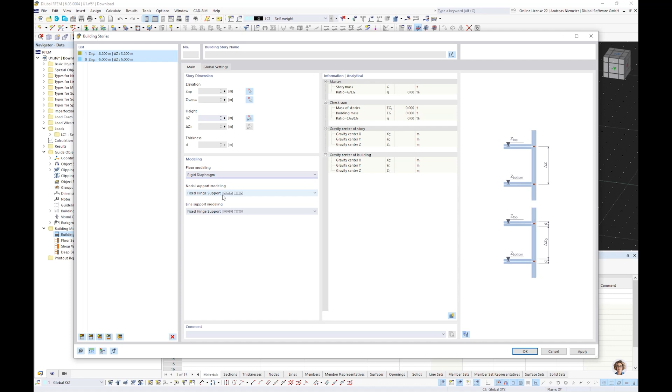Further, I specify that the floors should be considered as rigid diaphragms in the 3D structure, and additionally the slabs or ceilings from the first and second story should be supported on hinged supports - of course you can select something else. Now I confirm, and no blinking or highlighting info appears. Only you will see in the middle a dimension showing the height of the stories, not more and not less. And now we can start modeling the building.

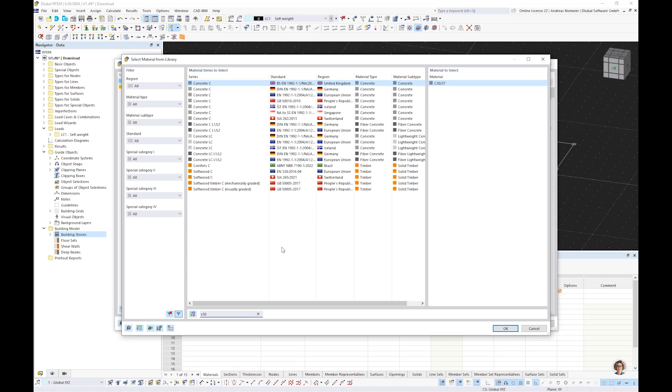For this I use, for example, the column command. Let's say we have columns here. We know the column should be a concrete rectangle, so I go into my library, select a square rectangle, maybe with a size of 300, and a concrete grade - let's select C30 here, and you see the program directly finds the suitable concrete matching this keyword, and we confirm this.

It goes gray, and now we can start modeling. The exotic part now is that the program asks me with a small dialogue: do you want to have this column in story 1, story 0, or both? In my case, both, and now I pick it. Oh, I can't find the snap point - so like in a CAD program, you can activate it here. And now let's go to the other places, and maybe it's easier if we use a top view and jump around this duct.

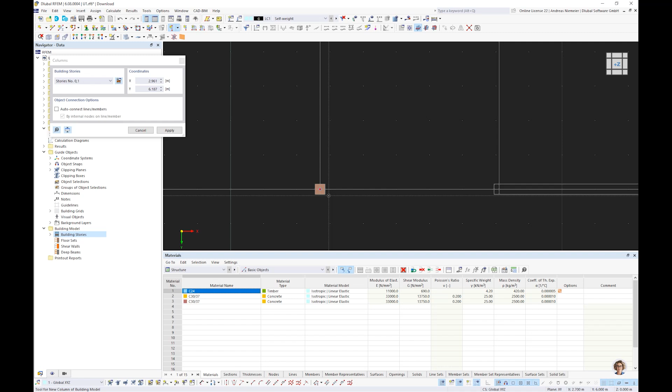Of course you can also copy if it fits. We have no rules for this. It's still like RFEM, that you can do everything in every stage, but now have a look. If we change to, let's say, isometric view, maybe make this box here. You see you have the columns here, and with the right length, 5 meters, 3.2. The same for, let's say, the ceilings.

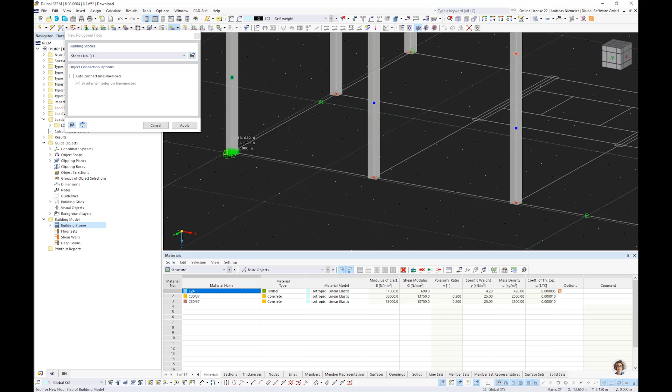We can take here maybe a polygon floor plate, and we specify here, for example, C30 and a thickness of maybe 22 centimeters, and go. And now let's say we pick, for example, the corners of the building, and maybe we realize, oh, we need it only for the first one and not for the others, so we can change it during picking, because the program will realize it.

And now you see we have this ceiling inside, also with the opening for the stairway. If you want to do the same for the top, we open the command again and say now maybe the upper story, and we pick the points here, and maybe this corner point here, and right click. Now we have the upper story.

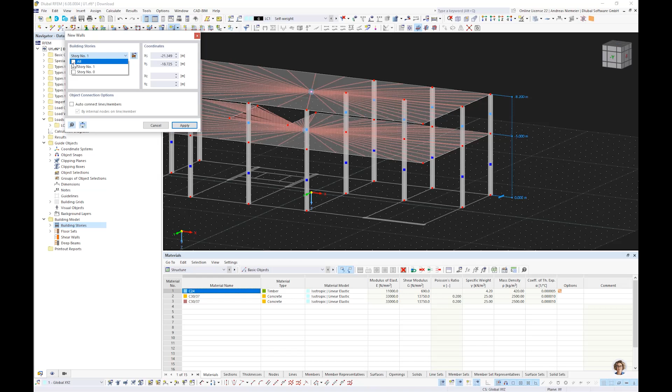And now we see, oh, we have also walls here. No problem. There is also a wall command where you can select maybe a different thickness, maybe here with 24 centimeters, but for concrete. And if you pick it, you can say for which stories. I say for all. And now we define the wall should run from here to here, and the same for here to here, and maybe the last one from here to here.

So easy it is to define a building with walls, ceilings, columns, and now it works like before. We can apply maybe supports, so for example here also nodal supports. Now maybe here, that we can grab all at once. So this is it, not more, not less.

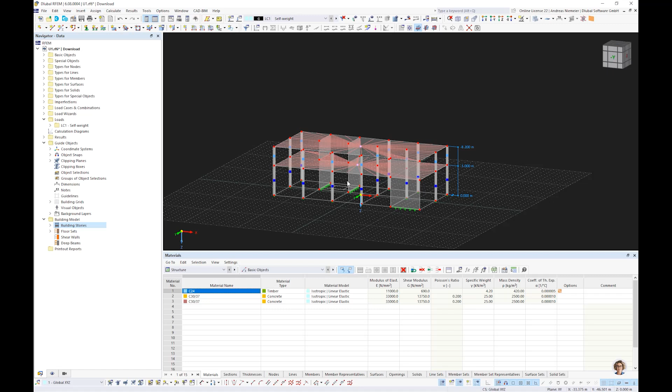And of course we can start the calculation, and you see the program is dividing the calculation job of load case 1 into 3 parts. Why? This you will see now in the results. If I scale everything up, you see here we have 3 types of results: walls, floors, and both together.

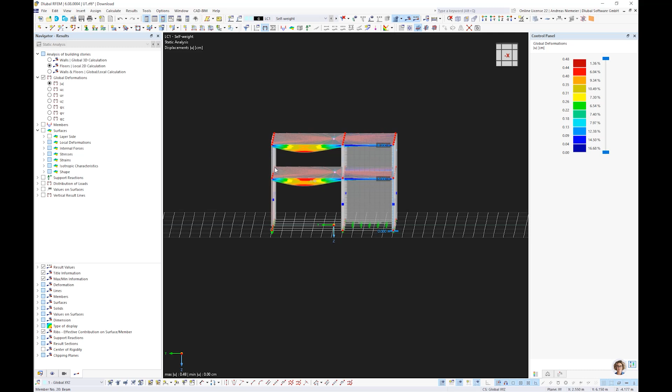And this is now the way of thinking like a building. You have now, for example, here only floors. This means the program interprets the floors as a separate substructure. It calculates the ceiling with separate supports and separately. So I get for these elements only bending moments, but no membrane forces, because I assume these slabs work rigid in plane, that maybe the main structure is working, but this ceiling itself I calculate separately.

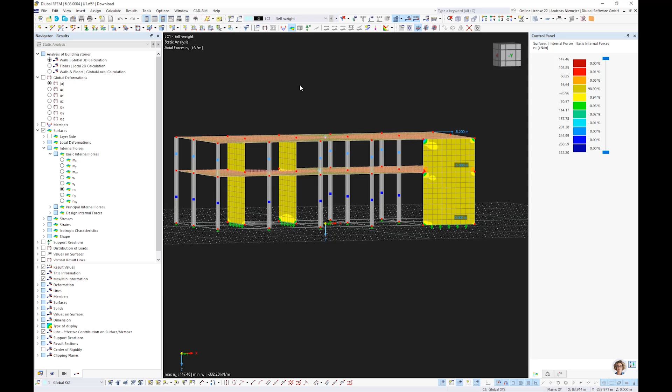And the support reactions from the floors I transfer to the walls, so that I can calculate the core of the building. This means in this model we have 3 calculations: one for the first ceiling, the second, and for the walls itself. So it's separated, and this ceiling is not hanging on the top, for example. So now let's extend this example; I prepared something.

So I close this and I open a more exhaustive example, it's called building model. So here you will see the same building with more stories, with different story heights, with a bottom floor, a ground floor, some regular floors, and a roof floor.

And you see also here, for example, the increasing normal axial force gradient of the columns, because I'm just visualizing the wall result. The columns also belong to it, and here we have our slab or ceiling, where you see these are the ceilings with deflection because of snow, but it acts separately.

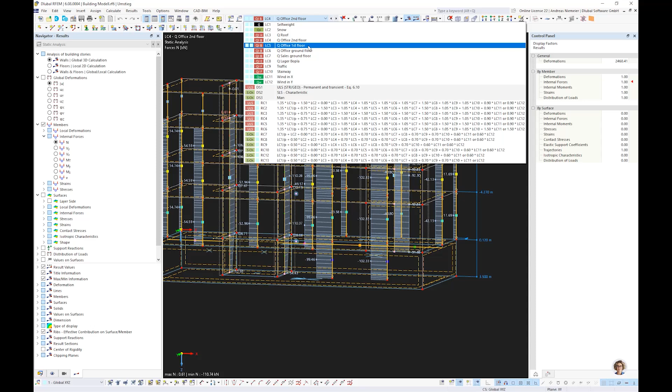And if you visualize maybe the normal axial force, you see the lower slab has no effect on the upper. For example, if we show here a live load, you see the live load from this ceiling is going down but has no effect upwards. So with this type of calculation you can control the flow of forces.

Further, you see with these results, if we watch here, for example, again this self-weight result, you get it not only graphically, you also get a table for this result. You see here in static analysis we have the way of thinking not only for members, surfaces, solids, but also for stories. The program gives you information about the mass per story.

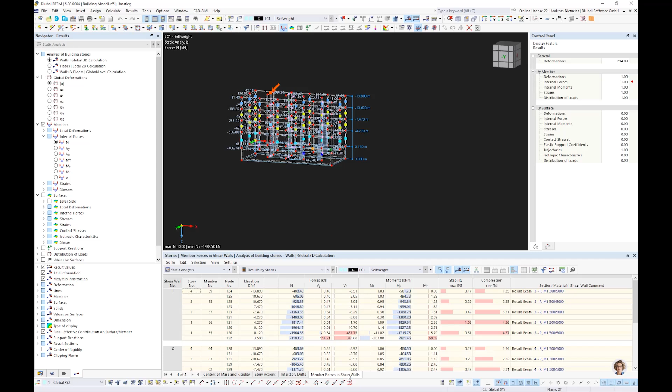The program gives you the center of mass for every story and the center of rigidity for every story. So it calculates it in this separate task. Further, you get for every wall in this story, if you specify it, also forces. So how can you define a wall?

Here you see in your building model we have not only stories and floor sets, but also walls and deep beams. In this case I defined 3 walls. They have a section like a beam, and one wall is this, and this in front here.

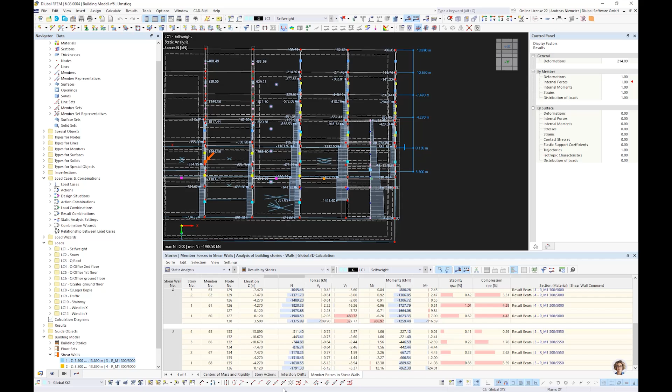And if I define it as wall, the program interprets it like a beam. And all these forces you get logged down here in this table for every load case. You see the increasing normal force in load case self weight for wall 1, wall 2, wall 3, and you get story actions.

These story actions are interesting if you take a look, for example, on wind. So we have here a wind load case in this horizontal direction. The building model allows you to interpret the building like a diagram and gives you the separate components per story. So the wind load on the top story brings 20.4, the next 32.4, 32.4, because we have a similar height. So everything is logged down over the height of a building, and this should help you to interpret the building, if you can simplify it like this concept.

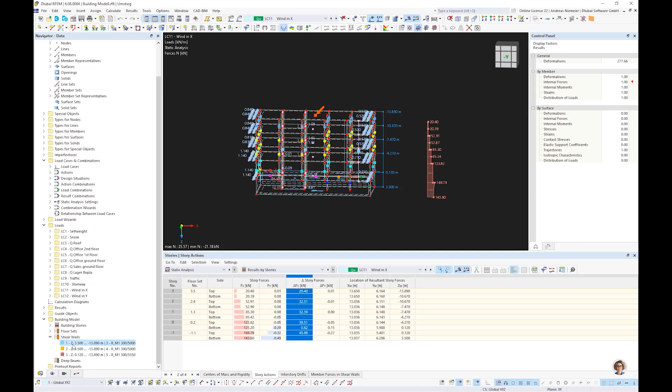If you have stories in between that need the transfer, or the reaction of deflection or the stiffness of the floor itself, you can control it here by defining if it's rigid or not, or if it's semi-rigid. So all these options are available per floor. So this brings me to the next point.

What if you have a more complex building that is not only a story-wise building with ceiling, column, and so on? Then of course you have to take all calculation options and consider stages in between. For stages we created a further add-on, but to explain how this is working, I prepared a model. I called it construction stages, and this should give you an idea which type of issues or challenges could happen when designing buildings.

Here I have a simple building. You have columns restrained on the bottom, a beam that is supported hinged on the columns, and a timber roof that is also supported hinged here. If you watch the forces from self-weight, at first everything looks nice. You get in the columns the increasing normal force diagram. But what is a little bit unclear is why I get such big compression forces in the timber beams from self-weight, even if there is no load on it.

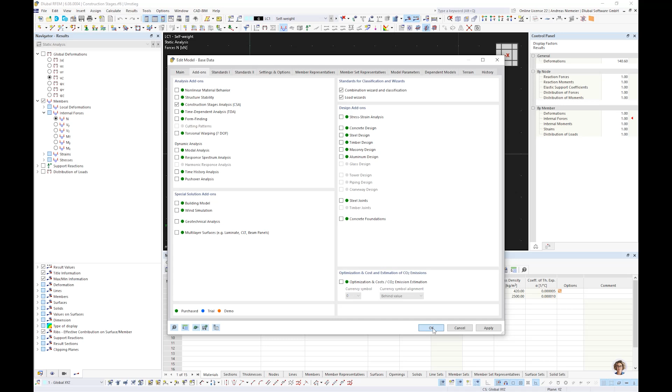And for this we implemented stages. Of course, such an option also existed in the old generation, but it was really restricted to third order large deformation analysis. Now it's completely integrated in the program and open for all calculation theories.

How does it work? At first we make a stage, let's say column. In the column stage we have members and nodal supports. The members are clear, these 2. Supports also clear, these 2. Then we have a next stage, let's say the girder. Here let's assign, it's really easy, it's like bricklaying. The next is roof.

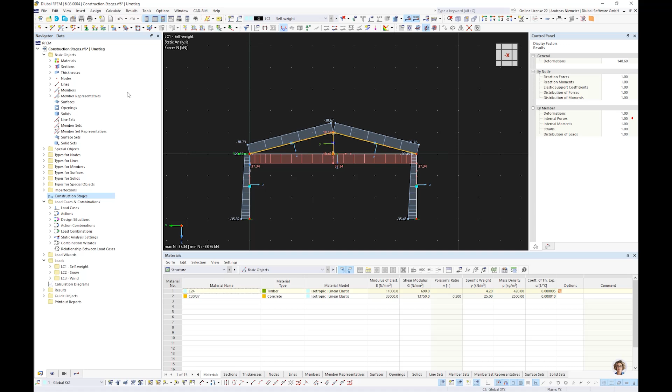So I selected these 3 stages with these elements. You can visualize it also: column, maybe I hide what is not active, girder, roof. Now the program has to know which loads act on it. I want to design column stage, girder stage, roof stage, and I expect that in stage 1, columns, only self weight and wind are acting. In girder, wind is acting additionally, and in roof, snow and wind are acting.

And what happens now? The program creates load combinations for every stage. So you have here a separate column for stage 1, stage 2. In stage 1 we get only self weight and wind. For stage 2 we get self weight and wind. For stage 3 we get self weight, wind and snow. And it's that easy.

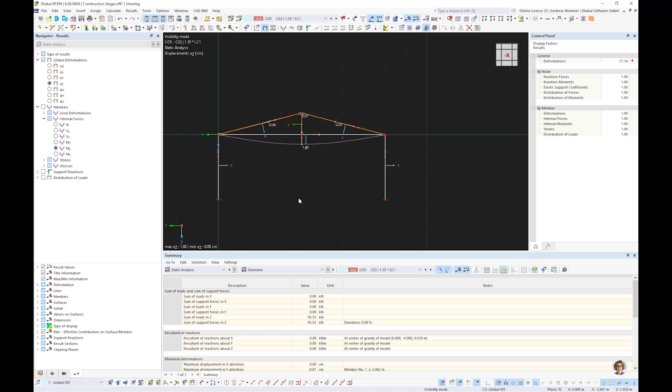So when I design this design situation, the program calculates it for every stage, and it cannot calculate all at the same time because each stage is always the basis for the next. If I calculate stage 1 only for the columns, with wind, they are loaded and will be deflected. Then we place the beam on it, it will be loaded, and also get the deflection. And here you see the camber, and on this deformed state we finally define for construction stage 3 the roof. And you see now in this type of analysis we have no tension force on it.

And this is what I want to show you. RFEM 6 gives you now the option to work like this. You can really define how you assemble it on your building site. And in comparison to RFEM 5, you now have the choice to use geometrically linear analysis, second-order or large deformation analysis. It's even possible to say the stages themselves should be analyzed according to large deformation analysis.

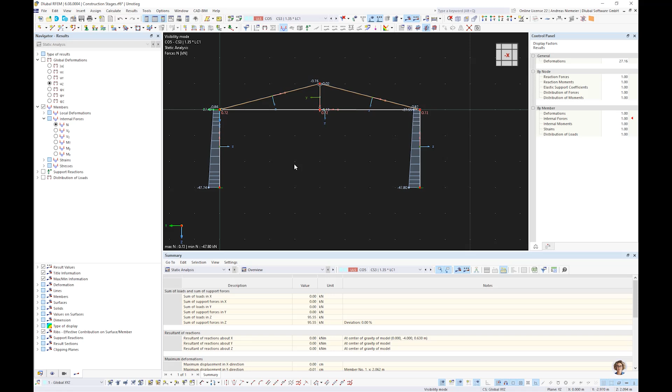And the individual load situations on these stages should be calculated linearly. It's also possible. Then the program changes the basis of this. So, further, this was the example: think like a building and interpret it. Now we come to the next point, and this means efficient usage of couplings, because we coupled here the stages, so construction stage with load, but there are more couplings possible, and RFEM 6, the new generation, lives from it.

This means I close this example and open a new example, where I want to take over reactions. For this I have the ceiling above the first floor, and the second model, the ceiling above the ground floor. To use the space of the monitor, I remove the spreadsheet and organize it in these two views. So we have here the first floor, here we have the ground floor.

What is the difference? Let's go through the model. If we take a top view, you see we have a line support here, so we simulate a wall. And we have a load case self-weight, we have a load here, a load here, and a load here, and all will be combined. In this model, from top view, we have no wall below, so this is one big room. And in the load cases, we have self-weight, one load for this room and one load for this room.

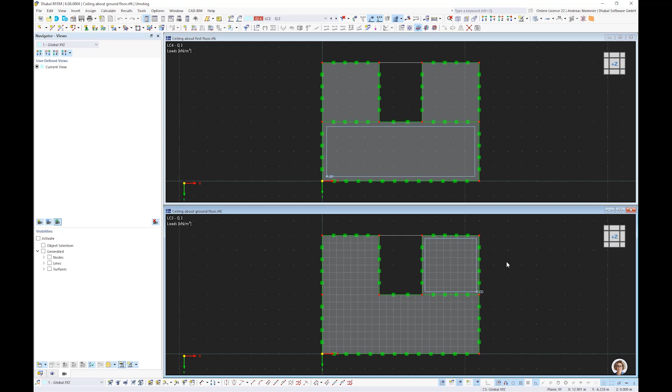And now the question appears: if I calculate this structure, I get support reactions for every load case. When I activate it, we get deflections and of course also reactions. And now we have to apply these reactions on this model. For this, I have to think about how I want to bring them in. I have here two basic independent load cases and I copy it three times: 3 from top, 4 from top and 5 from top. If you wish, you can also sum it up. You will directly see what happens.

What we should avoid: we have here these three load cases. Number 1 is clear, 2 is clear. Here, because I copied it, we don't need a load on it. Delete and delete, so these last three are empty. And now you can use the wizard for taking over. We have here import support reactions. You can say, I want to import it from the ceiling above the first floor. It's in the project from Dlubal Center.

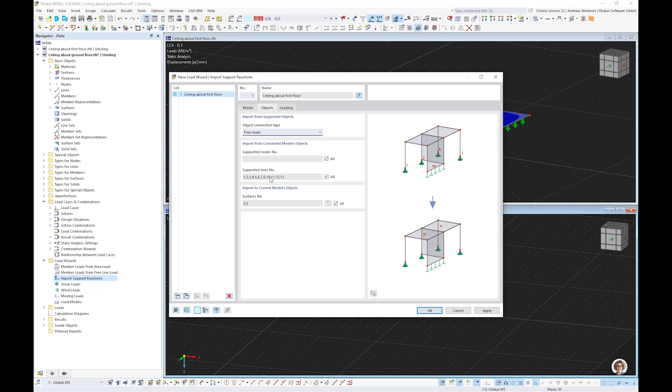You can decide whether you want to import support forces as object loads or as free loads, from all supported nodes and lines, meaning these lines and nodes, and on surfaces 3 and 5, meaning these surfaces. In comparison to RFEM 5, we can use nodes and lines without exotic connections. Further, you can define the transfer to load cases: load case 1 should run into load case 1, and the other three load cases should run, manually, into 4, 5, 6. So here you really can decide which load should be transferred.

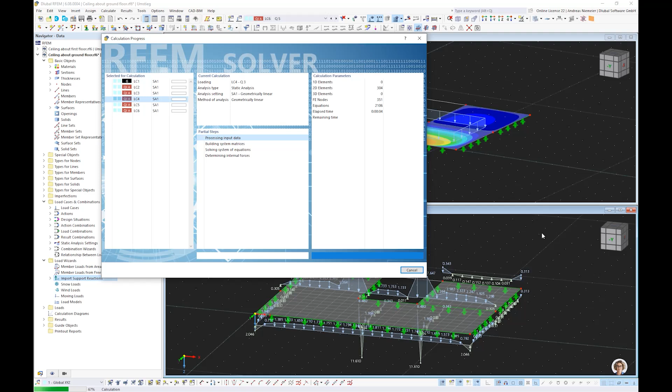The program visualizes it with a question mark, and if I calculate it, the program will take the reactions from the upper model and define them as loads on this one. Use connections efficiently, this is the point I want to show you. You don't have to write anything, it's done automatically. And what is really nice: self-weight is clear, it's a permanent load, and where we have a wall on top but not below, you also get a free load here. The regular load cases are used as defined in the table, and here we have the loads from the separate load cases, from this room, this room, and this room. This is a really efficient usage.

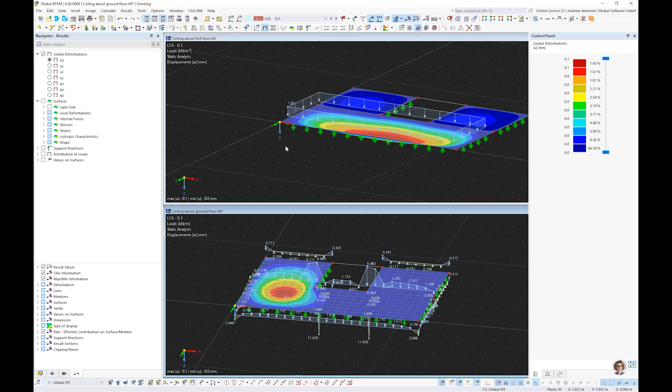And what is also really a difference to the old generation: if you have the situation, for example, in the permanent state, where we have a load from the roof. For example, I use a standard load of 1 here and here, and we also have a horizontal effect, maybe in X.

Let's use here 1, and let's use here -1, so that we have some roof load effect. And you specify now in the lower model, in the wizard: program, please use for the permanent state not only the Z direction but also the X component, and confirm it. The program wants to delete results. Yes, we have to save, clear.

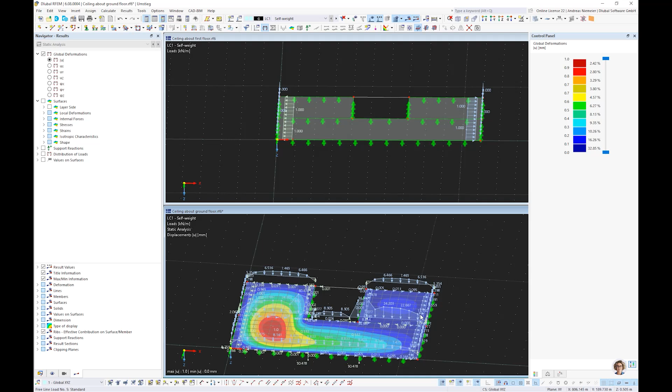And now when we recalculate, the program is using the data from the model above, also the horizontal stuff. So it calculates first the floor above, and then it uses these results in the lower one. And you see now in load case 1 we also have this horizontal effect in the forces. So this could be quite efficient in your work.

And if you say I want to freeze something, no problem, go here to disconnect and disconnect the dependent model. Then the program gives you, for this load case, plain loads that have no connection to anything. So, efficient usage of couplings. You can update it, but you can also break the update.

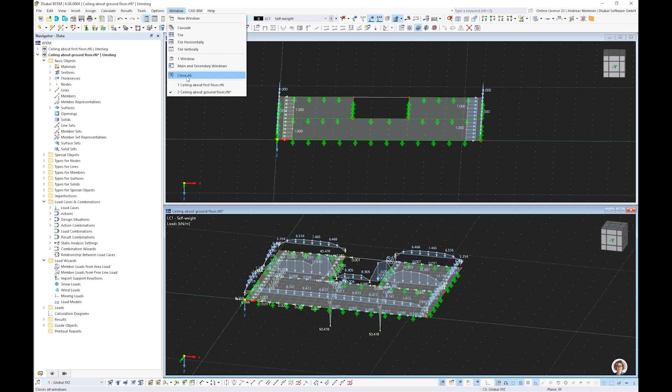And now let's come to the next coupling. Completely different topic, but it's also coupled. For this I close all and open a new scheme. Let's say you have to design a user-defined cross-section from aluminum. For this I open our cross-section modeler. I call it UU1, for example.

And you know, in comparison to our old generation, in the old stage we had SHAPE-THIN and SHAPE-MASSIVE, 2 programs. Now we have only 1, and you can decide here massive or thin-walled. Let's start with the massive one and create a user-defined section from aluminum that is extruded. For this I open it and specify the material, which means make a new row and write here maybe EN AW-6061 and use a T6 material.

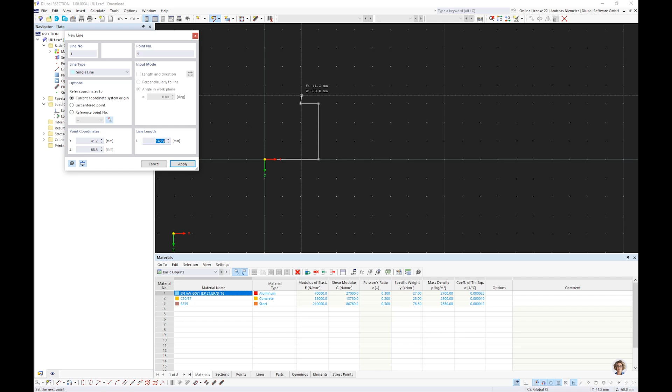And now we can start modeling this section, and of course you can do so many things, but I use these grid points now. So we have maybe here a line with 60, 60, 20, 20, some section like this. This is now a polyline. I can extrude it, you have functions here to extrude it. So let's say we have a thickness of 3 millimeters, so we extrude it 1.5 to the left and 1.5 to the right. The center line we can break, and these 2 lines we can select and break into single lines.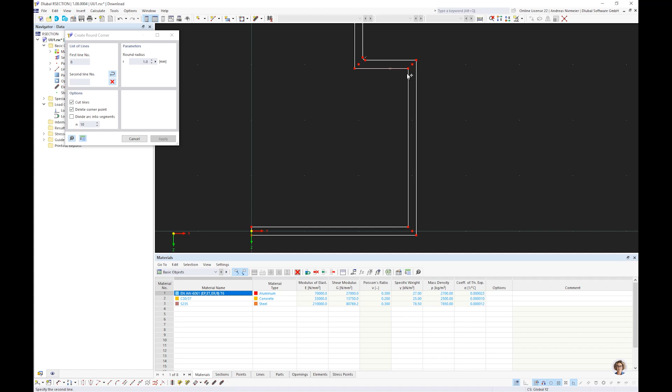Now let's say the geometry is closed. I close here, and because this is manufactured, I have here some roundings. I want to show you these roundings because this is always in conflict with thin-walled sections, which would have a striped geometry, and this striped geometry is always the break between massive and thin-walled. And now we've reached a development state where you can simulate both.

So this is the first part, where we say this line geometry is from aluminum, we fill it with a material, we calculate it and we get section values. Quite easy. Now this section could be used in RFEM, but you can't design it because the aluminum codes want to know the c/t stripes regarding buckling and shear. And for this, it's no problem. In RSECTION, you can extend it. You can say, yes, this is thin-walled, and additionally the aluminum stuff should be considered for the stripes.

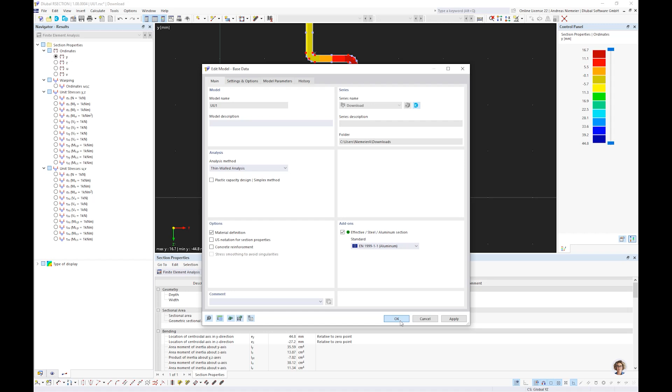And now let's insert these stripes. We have here stripes with a thickness of 3 millimeters from this aluminum, and we insert it, and you see they are really rectangular and have overstand, but this is no problem because we use a mixed calculation of massive and thin-walled sections: for the bending relevant part we use this part, and for the shear and buckling relevant parts we use these stripes, and you see the program will move these stripes intelligently according to these roundings.

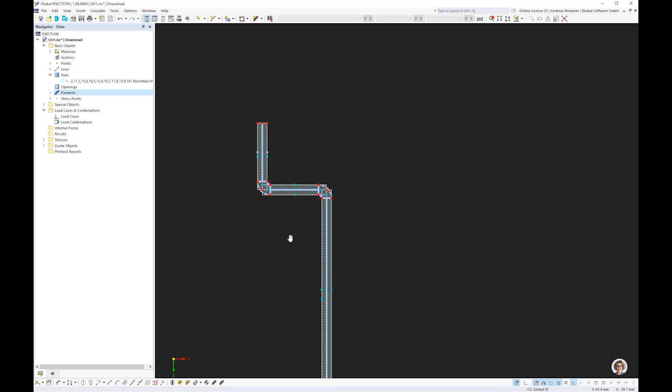So now when you calculate this, you also get section values, no problem, but then you can also use it for design, and this is the digital connection you can use efficiently. So I store it, and now you jump into RFEM and make an easy aluminum calculation, call it U7, and check here aluminum design, and let's define a new member. Define the section here, go to the library, say I have a user-defined section UU1, and insert it into your model.

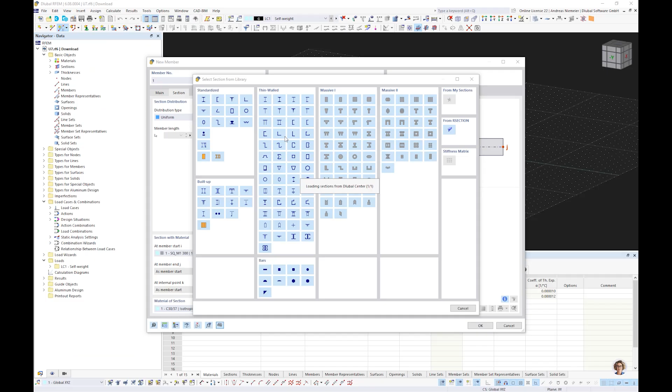The program is efficient, takes directly the material you defined, it's hard coded, and now you can pick this member into your space. You see you have this geometry directly in your structure. For me at the moment it's irrelevant, but we can support it. Of course we can also load it, maybe let's apply 2 kilonewton per meter, and now the concept of RFEM 6 is working.

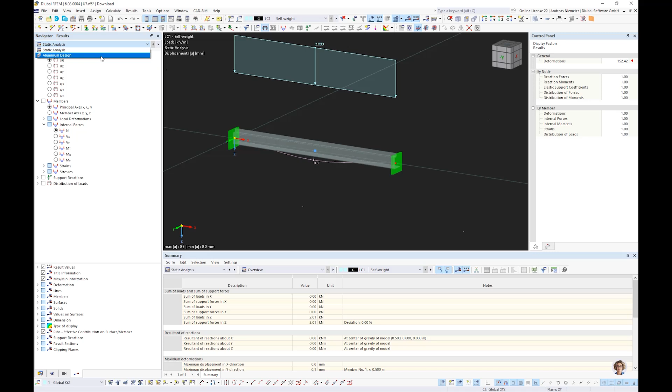You only click on calculate all, and the program is doing the rest. So it's meshing, then it's creating combinations, and it's doing the aluminum design. And you see you get not only deflection, you also get here a deflection curve. Yeah, so this is pretty cool. But now I want to show you the next stage.

If you realize you maybe made an error, or you have a change, so the cross section changes a little bit, double click the member, and you have here an RSECTION button. This means the program opens RSECTION live inside RFEM in a special mode, and here you can say, I have a new stripe here because I forgot it, and you add it. Okay, and maybe I redo it because it's not that... again, section from here to here.

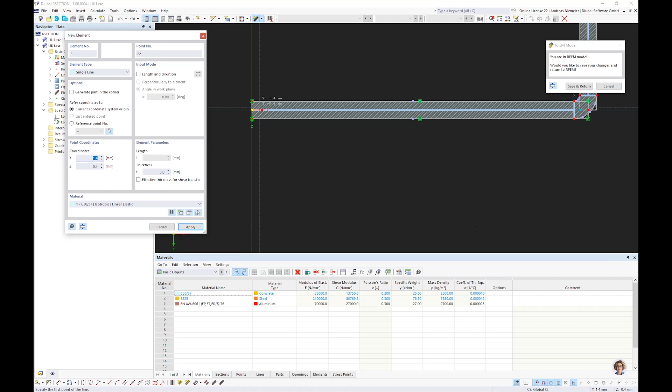Yeah, and now of course I know what I made wrong. Not from concrete but from aluminum. Now the color fits. Exactly. The program is recognizing the same material and merging this stuff, but these corners I don't like, because this is a little bit unnice. So let's say I change my view and optimize it. I say here I have a rounding of 1 for the inner curve, and the outer curve is maybe 4, and you see directly how these stripes are changing.

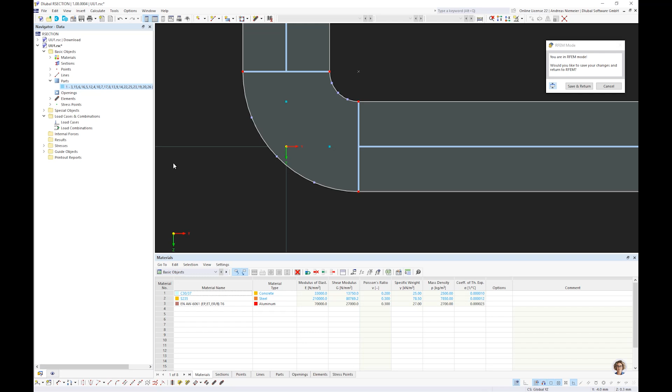And now you see this surface now gets red because it still has these lines inside, so we remove it and change it to this, and now everything is fine. This stuff could be deleted, this stuff could be deleted, and now it's ready. We can save and return, and the program is updating this section. Okay, and now we have this section in our program.

And I press calculate all, it's efficient, and you can directly design it. So we really invested a lot of work in this live change of sections. You can do it for all types of sections, not only RSECTION sections but also standard sections. That should help you. And now you see you directly get a design for the new section.

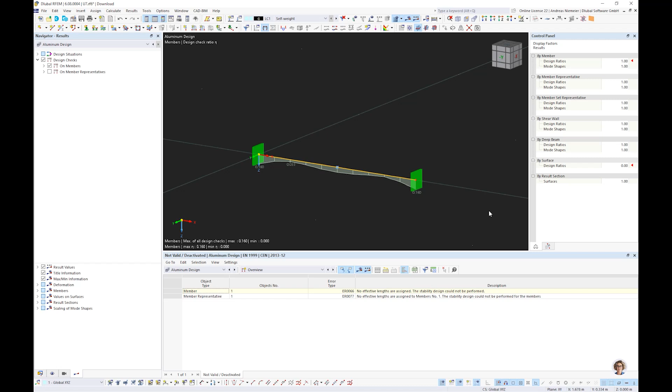So now this brings me to the next main point: how substructures save time. Substructures, how to introduce you here. So I close this stuff and open a new model. In this new model, I define first a name, UU8, whatever, and I define here the multi-layer model. Why? You will see.

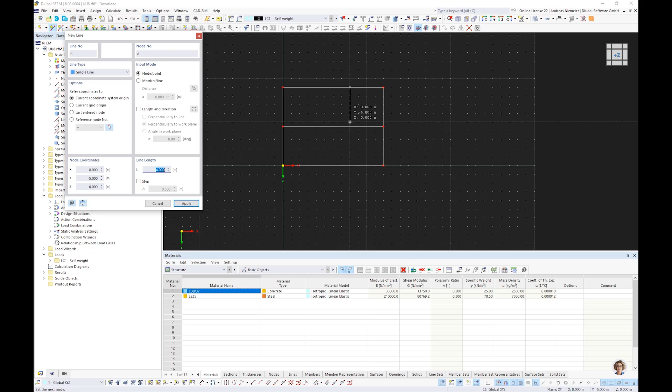So first, our task, for imagination: you're a designer, you have to create a story from timber frameworks. Of course, we can read in a DXF floor plan, but now let's make it pretty easy. When we are on top view, we can say our building is typically 12 meters long, 9 meters wide. We describe it really easily with a few lines. Let's say 4 meters. So this is only my idea of an easy floor plan, not more, not less.

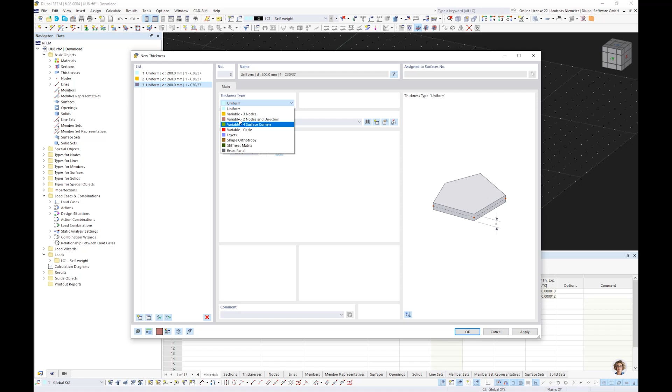And now we say this floor plan should be created with 3 meter high timber frame walls. How can you do this? In this case, we select lines, copy, say please copy minus 3 meters in height, create new surfaces between original line and new line, and the new surface should be a standard surface with, now the multi-layer add-on is coming in, a type beam panel.

And here you can specify sheeting. For example, we have a sheeting from manufactured timber. So I select one here and define it as orthotropic for surfaces. The thickness is maybe 15 millimeters. And the same I use for the other sheeting on the other side, also 15 millimeters. And for the framing members, the members around, I specify a new section, here a section from timber, new material, maybe C24.

Yeah, and the sizes are maybe 6 centimeters to 20 centimeters, so I have some space for insulation. And we can select this section for all framing members.

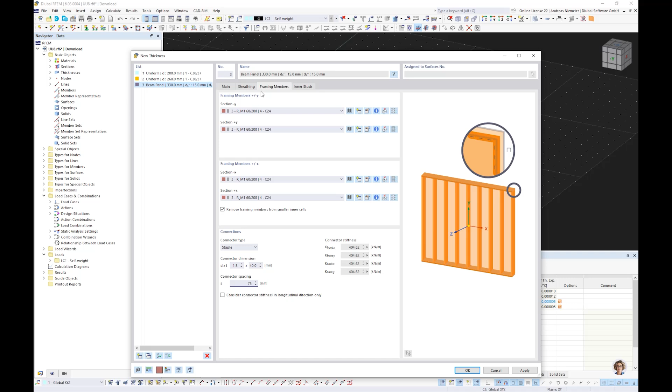Now we have to specify the connection of the framing members to the sheeting. So I use staples with 1.5 by 40, with a distance of 75 millimeters, and for the inner studs I use this same section with a spacing of 625 millimeters. It's the width of the panels, and here we also use staples with 1.5 by 40, 75. From this the program calculates how it's connected.

So now we have defined the thickness, and if we copy the line one story above, we get brown surfaces. Looks really nice so far.

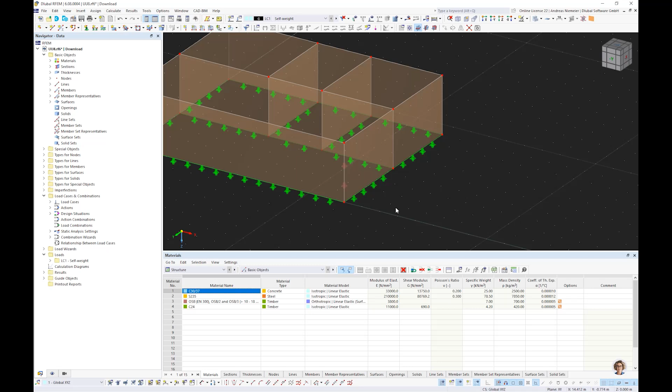And now let's say we can support it. Maybe this support, not. And because I'm interested what happens, I press calculate. You see the program is meshing. It needs some time. Load case 1 is calculated, and you get nothing.

Strange. Now the idea of substructures: of course you get here support forces, but where does the rest go? These surfaces give us no result. Why? Because behind these surfaces we have substructures. We have here, let's say, beams with surfaces, with springs. So there's a really complex model behind, and we defined it only via surface.

And you can calculate it. If you watch the forces, these are the normal axis forces in the member, how the normal axis force is increasing. Of course you have to take care more about loading, but you see you get a calculable model with this substructure idea, and you don't have to model it by hand.

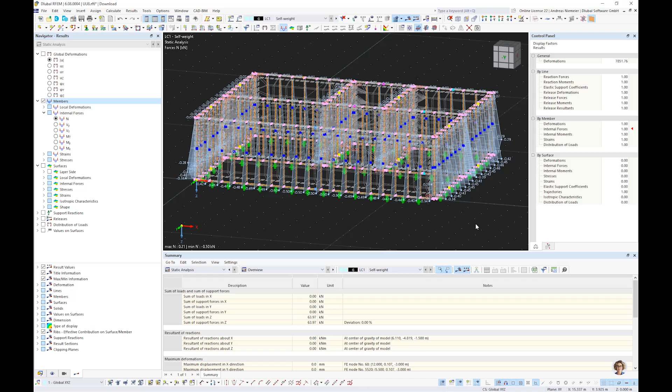We only copied surfaces. And now one step more: imagine you have to define windows, because it's really dark without windows. So let's create a window in front here. Let's say we have maybe here a window, and yes, we have maybe here a window.

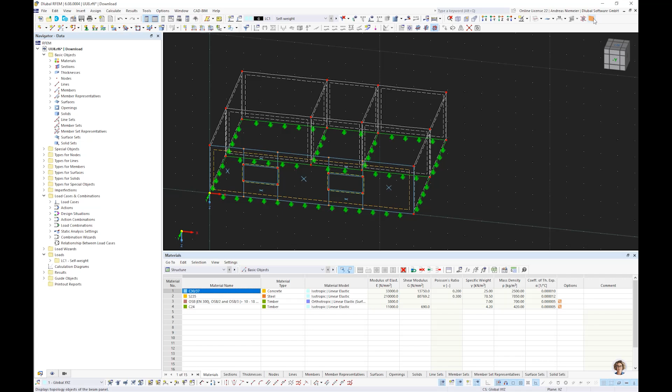What happens? At first, nothing. But if I define here a cascading distribution - how to say, create surface cells around the opening, if I create lines here - the program is able to make a cascadic orientation or a selection of the surface parts. If I do this, the program is able to consider windows with a beam above and below, and also take care of the right distance of the vertical members. So it can really be a time saver, and you only define a few surfaces with a specific thickness type.

So this is one story of substructures. The second story, what is also important for me, is the mentioning of the load transfer surface. For this, I prepared a model, so I close it. This was an infinite wish in RFEM 5 generation.

The people ask us in support always: hey, do you have an element that has no effect for statics or for structure calculation, but can transfer loads? And we gave tips and hints to modify the stiffness matrix and so on.

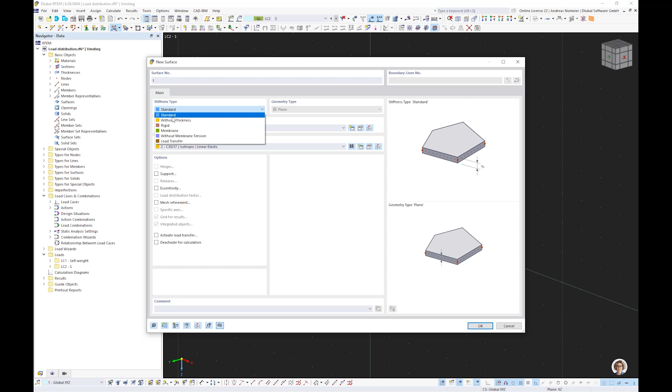Now we have it. So if you have here a typical structure and you have to load it by snow, why not make a load case - of course we need one, so call it snow. Give it a type, but this is maybe not the feature. The feature is that you have here a surface, maybe by boundary lines, and you have a specific type: load transfer. Now you don't have to define thickness or material, because it's not needed - it has no structural effects.

And now we can pick it, pick the boundary lines to be considered, of course. And now we have the surface inside. You see it in rendering, and now of course you can apply here maybe a projected snow load in Z, standard size is 1, and apply it.

And if we calculate it, we get, let's say, forces on the structure, although this surface has no effect. So pretty cool - we have no surface forces. You can watch what happens inside.

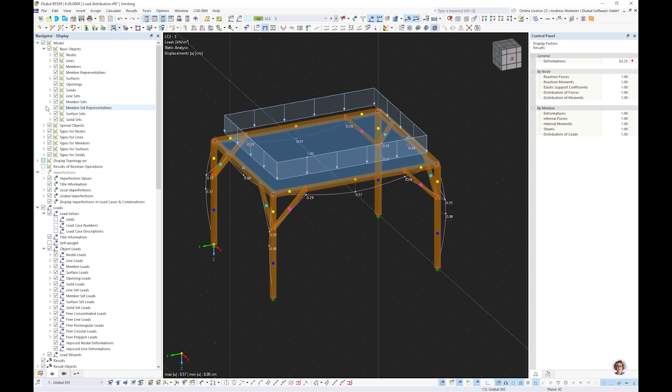You can say surfaces, you can say here maybe load distribution, and you see the program is distributing the load on the surface as a homogeneous constant load around. If you say it should act only in one direction, go into properties and say only maybe in Y.

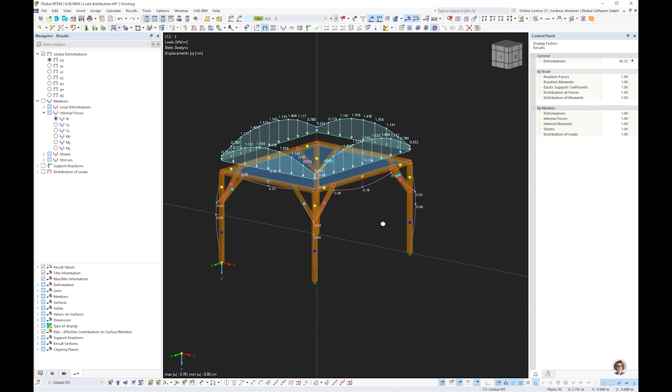This means he takes out this surface in a separate model, hinge loaded, supported hinged, calculates and takes the reactions as loads for this structure. This gives you a real picture of load distribution from these surfaces. And of course this is cool because this surface has no effect for calculation, so you can really rule how forces are flowing, and you can use it not only for plane surfaces but also for, let's say, curved surfaces.

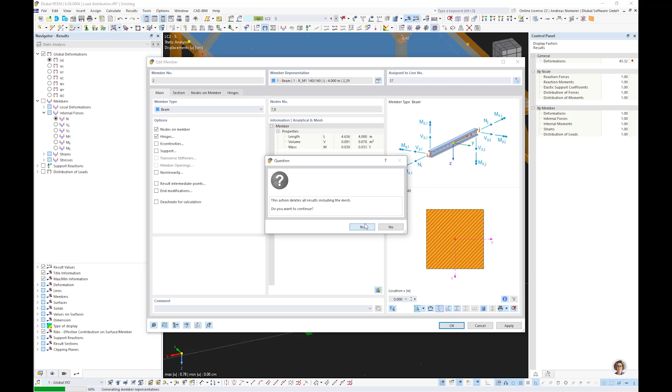So the beam is running in the right direction, this is maybe vice versa, so the orientation. Now we say this beam is connected to this line, and so structure is changing. Maybe first we copy, it's easier. Now we can say this beam is connected to this, apply, and this beam is connected to this, and apply, and this surface is not plane, then maybe quadrangle, and have this line included.

And now we have a curved surface, and if we calculate snow load again for this curved structure, it makes no difference. The program is taking out this curved surface, calculates distribution around, and uses the reactions as loads on this timber structure. It's only your game to, let's say it's more complex. Imagine you have to do this by hand. Substructures save time if you have such cases.

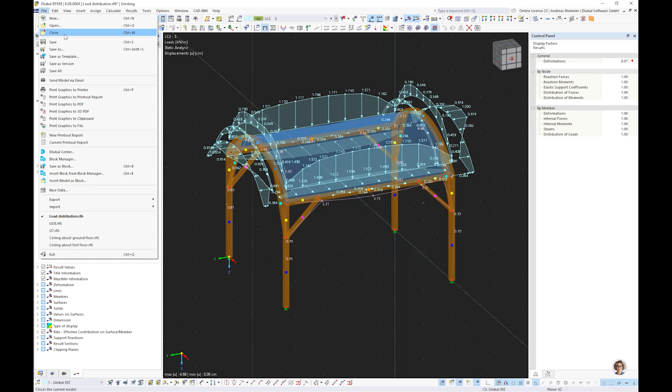So now I come to the next point: simply grasp reality. Let's say this is always our task when we calculate, how we can grasp the reality so close as possible but so rough as possible. For this we extended our new generation with a few tools. Maybe the most famous one is here.

So I have here one, where this is it. I don't find it... torsion. Member torsion, yes. So here's a really easy structure. I think everybody from us would first say, yes, I calculated by hand.

Simple beam, I-section, pinned, supported against torsion here, with a main load vertical, or a smaller horizontal load. What happens if we calculate it? If we calculate it, we get a few forces. Of course we get a deflection, so let's say we have a vertical deflection of 1.9 centimeters.

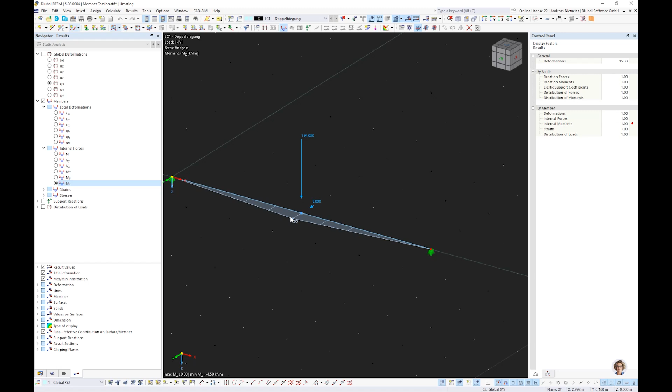We have a horizontal deflection. We have a bending moment in this direction, 4.5. Take a look, this ends up, let's say, in a stress, just so you have something in mind, an elastic stress of 280 Newton per square millimeter. And what is also interesting, imagine we have now here a pin support, a fork support. We have a biaxial bending, and we would expect also torsion, but torsion is 0.

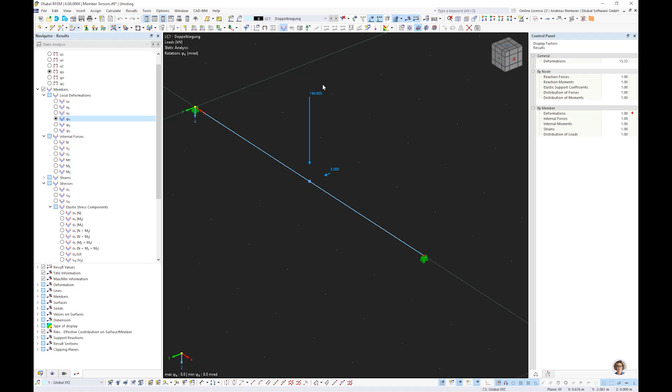Now my question: of course we get bending moments that seem to be real, deflection seems to be real, but the torsion is questionable. Why do we have no torsion? Yes, maybe we have to activate in static analysis a few more checks or options. So let's say calculate according to third order. Third order large deformation analysis is always able to consider all effects. Could be, let's try, calculate.

So you see, meshing, static analysis is running. It seems we have some effects, and you see also the solver has some vibration oscillations in it. Let's take a closer look at results. And wow, we have now a rotation of 845 milliradians, seems to be pretty big. Also, if you take a look, bending moment MY is clear, but now we have 220 kilonewton meter in horizontal direction from 4.5 kilonewton meter.

Sounds a little bit strange to me. And even stress, 1616 Newton per square millimeter. Wow. So it seems to me like a bug.

But you always have to grasp reality. Is the program able to consider this effect here? We have an open cross section with a biaxial bending, which should induce some torsion. And the challenge is the program knows only 6 degrees of freedom, it has no warping stiffness in it, and without considering this warping stiffness you are not really able to model such stuff with members. So our team implemented for you in RFEM 6, and this is really new and gives you much more options, the warping torsion degree, the 7th degree of freedom of warping, into the main calculation.

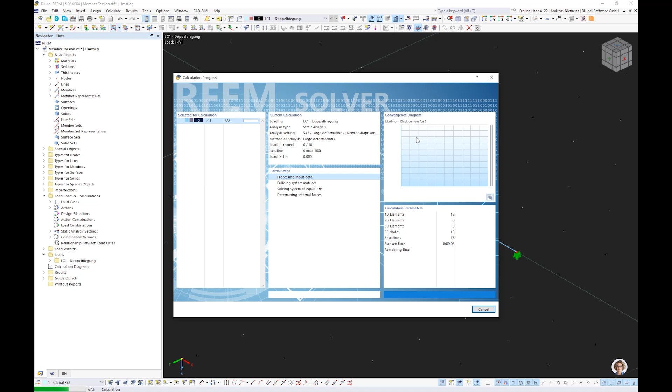You can connect it to first, second, third order as you wish, in branched models or only in one member models. And if we calculate it now, you will see you get results that fit a little bit more. Now we have a stress of 527 elastic stress. We have, let's say, a torsion of 81 milliradians, so much smaller. We have maybe a bending moment MY the same as before, and horizontal 28, so much smaller.

And we have also a warping deflection at the end of the supports, and we have a primary torsion and a secondary torsion plus a warping moment on the structure. And with consideration of the warping plus primary and secondary torsion, we are able to capture all effects that happen, and we are able to calculate so close to reality as possible. And this could be connected to first, second, third order analysis. So this is what I wanted to show you, and you are now able to use 7 degrees of freedom in a member structure connected to shells in RFEM. This is really new.

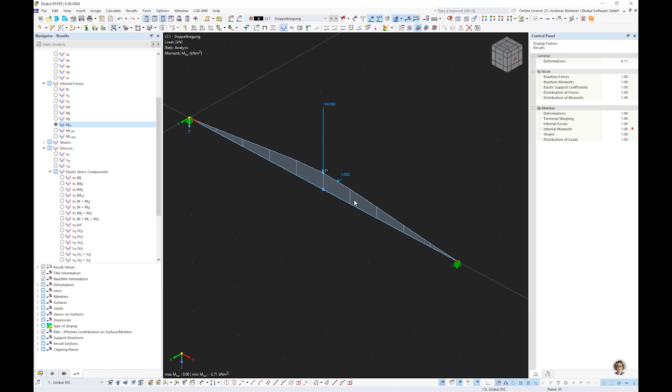Now I want to come to the next point regarding simply grasp reality. Let's open a new example, especially regarding connections. I call it joints design, and my example is as easy as possible.

We have beams, and now here stresses. Let's take a look on Mises stress. Maybe about 32 Newton per square millimeter on the beams. You see also here 0 point, and here again the restrainment on the column.

So far, let's say everything is clear. What is also interesting, we have here in the mid 65, here 47. But we don't know how the force is transferred from this girder to the beam.

For this job, we have created an add-on called steel joints. If I use this, I'm able to say on these nodes here, I want to create a joint. I can select from a...

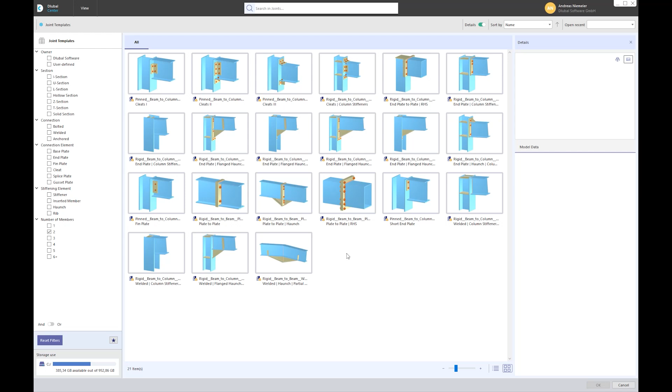I have a really big library of connections, where you can also create user-defined ones, but here it gives you a first idea. For example, here we select this example and say, please assign this connection to these frame joints.

Of course, the program is doing it. It thinks a while, because you have to adapt this template to the new section sizes. And now we confirm it and say...

Yeah, looks good. This looks a little bit strange, so I don't like it. I modify it. I grasp reality. I say I want to have here a cap plate on beam 1, and then I think it's more like I like it.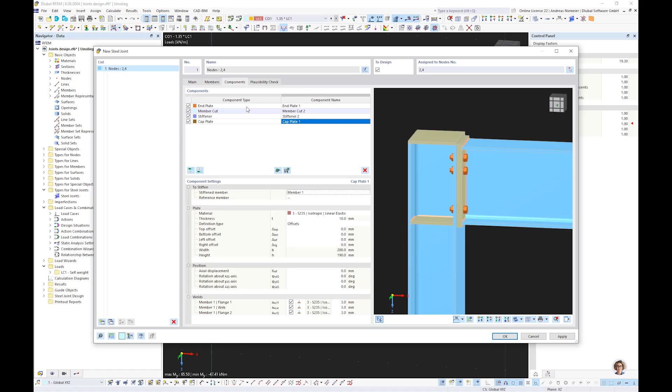Now we grasp reality, we can specify weld sizes, everything, but here we can also say we want to do ultimate limit design, but also stiffness analysis. And we say, please make an interaction with the main structure. Calculate initial stiffness and generate hinges in the main global model.

With doing this, I have to tell the program, okay, please do it for member 1 or 2. And I say, yeah, please do it for member 2. And now we can start calculation.

Calculate all. And of course, I know this takes a while, but in comparison to RFEM 5, you have now a lot more options.

You can define the connection like it is. So, do we have a cap plate or a stiffener? Do we have different bolt distances? Do we have weld lines? Do we have on every element a weld line? Is it bolted? Is it welded? It's your game, you can decide it.

Additionally, because this technology models a shell model with nonlinear material law and checks the strengths in the end, this allows you to apply normal force, shear force in Y, in Z direction, torsion moment, My and Mz bending moment. So you can apply all forces, independently. We use this with this concept.

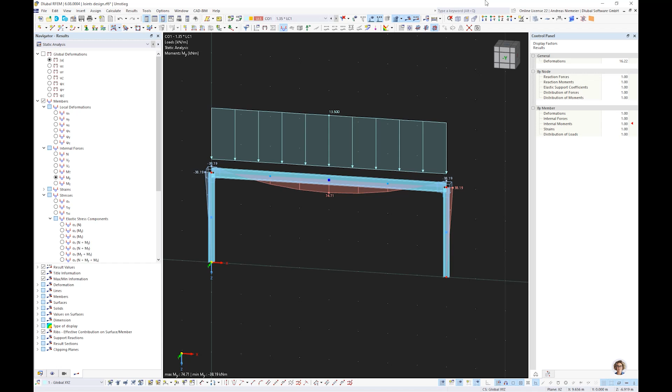And now you see what happens. We get into the joints design. So let's open tables, go to the joints design. You get a utilization.

You get maybe the design check written directly here for all that is done. You get a stress and strain view of the connection for every element separately. You can say, show me plastic strain, show me equivalent Mises stress.

And finally, you also get hinges on the end of the members. So you have here, for members, hinges where the program writes the diagram, the reaction or answer diagram of the connection to the model from the stiffness analysis.

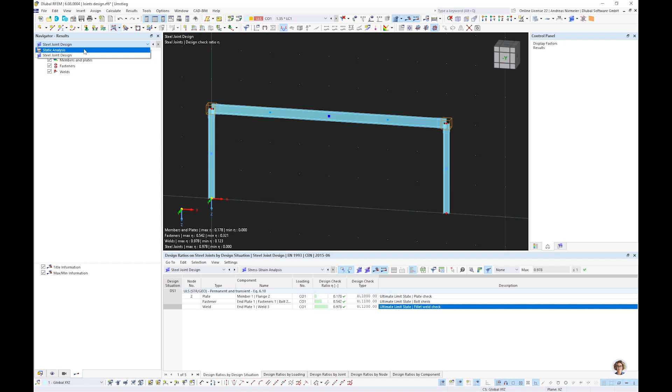And if you watch now the result, if you go here to static analysis, you see before we had 65, now we have 74, and here we have 38. So this part is increased and this is decreased. So you can grasp reality now, interactively.

And this brings me now to the last point of my part today: what means evaluate results in a targeted manner. Still a pompous title, of course, but...

I want to show you which work our developers did for you, so that you have an easy game in checking models. And for this I prepared here a structure. Where is it? Something with diagram. It should be.

Here, calculation diagram. Let's take a look at first the model, so that you see what we are doing. So this is a simple beam with a transversal load. The beam is modeled from shells. The web has a thickness of 6.5 millimeters. The flanges have a thickness of 10 millimeters.

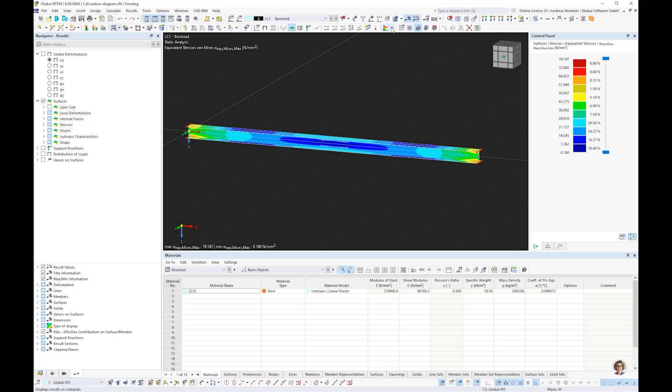Now I want to give you a picture of what we want to do. Let's say I want to try to find out the carrying level of this beam, which means how much load we can apply. Let's calculate to the plastic resistance. For this I activate in the add-ons the nonlinear material behavior plus structure stability.

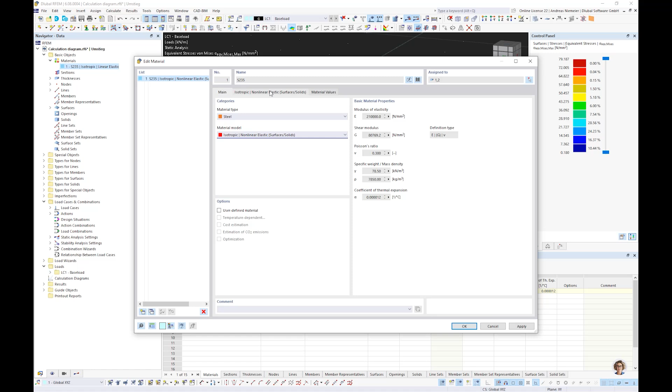Why nonlinear materials? Because I have to set the material steel to be not linear isotropic, but nonlinear elastic for surfaces. What does this mean? You can select here different diagram types. I take the easiest one, elastic, and then the nonlinear elastic diagram, at first with standard Young's modulus and then with a hardening modulus, and we yield at 235 Newton per square millimeter in the Mises format.

What happens if I confirm this setting? Of course, results will be deleted. I can calculate again and get results. The same, because we changed nothing on load and it's still elastic. So now let's try to come into the nonlinear elastic part to get some yielding effect.

For this I take this base load and activate here stability analysis. I don't want to calculate buckling or something like this, I want to increase loading stepwise. For this I take the incremental method without eigenvalue, and define here some parameters. My starting load factor, maybe we increase it always by factor 1. Refinement should be done with 5 in the last step, and we want to have maybe 10 increments.

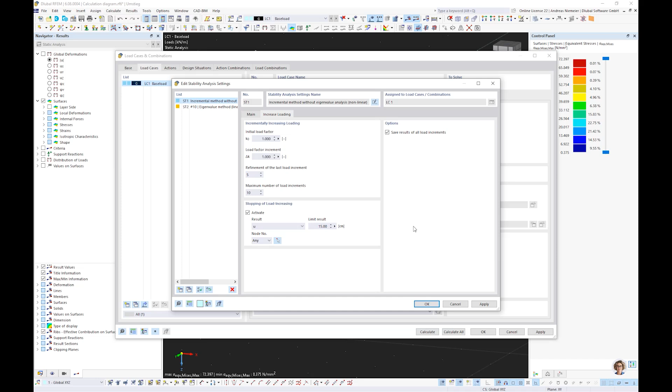And if we do this, the program has two steps. One for static analysis for the 10 kilonewton, of course, and the other is the load increasing step. You see now how we increase load stepwise. Now we come into this yielding effect. Of course, we see only the diagram now, not more, not less, so we cannot decide what happens.

But later we have to look into this result, and because we store every result separately, we have the chance. Of course, such a function works also in RFEM 5, but now we created something around it that makes this easier for you. Now slowly you see we have increasing gradient. We are here at 10 centimeters, so slowly these reactions are interesting for me. We come close to the 15, and you will see what happens if the 15 appears, so you have full control.

And now it stops and tries a second look if it works. So it tries again to load it in the last increment. The load factor is already reached so far. You can watch it during calculation, and now I think it will learn it makes no sense and stops calculation. So this is connected to the stability add-on. Only a robust function in this case.

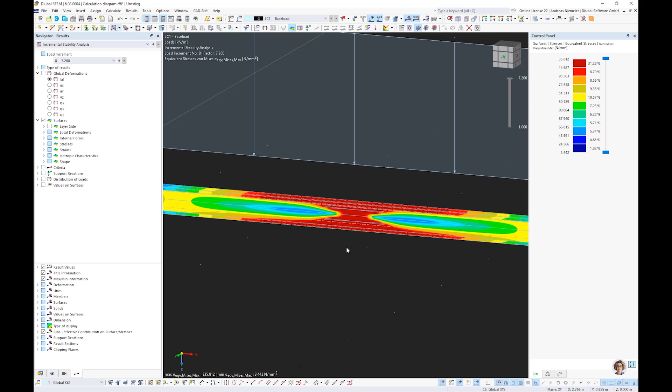But what is now the change? In this view, nothing. Of course, we have to change here to incremental method. And now we get a really interesting picture. Red in the middle, red on the right and left side. Seems like a plastic bending moment. Plastic load distribution. The same here.

What is also new? You have here such a scaling factor. You can say this is load factor 7.2, this is load factor 1, what we saw before. Maybe you can change directly here in between.

Further, you have the same box of this factor here on this result part. You can watch all results. The result we're just seeing is the von Mises stress, so we have, let's say, the stress 235 here in the limit we defined for yielding. What I like more is the criteria, because then I'm independent from the defined limit stress, so yielding is defined with factor 1.

So if you want to analyze it over the length of the model, how can you do it? In this case we have these result cuts. We can say please cut, for example, only this surface, and of course we have to say where from, maybe from the mid to the other side. And we should visualize this result in y direction. Now you get the diagram here inside. Of course you can hide this and you see it much better.

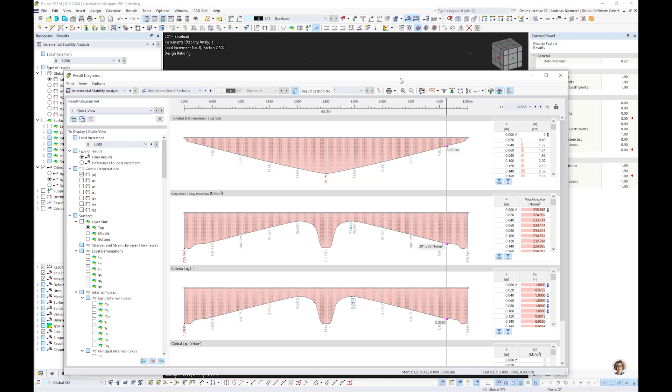But what I like more is to select it and to jump into such a result window. And this is now non-modal programmed, which is new in comparison to RFEM 5, because you can work at the same time in RFEM itself if you have two monitors.

And now let's say we want to see deflection, maybe here U, and we want to see here criteria eta y. And again you get here this increment bar where you say okay, this is load increment 1, then 2, no problem, 3, slowly we come here to the limit 1. Now you see you have here yielding slowly, and now suddenly here it's reached, and in the middle it's starting, so you can analyze it quite easily.

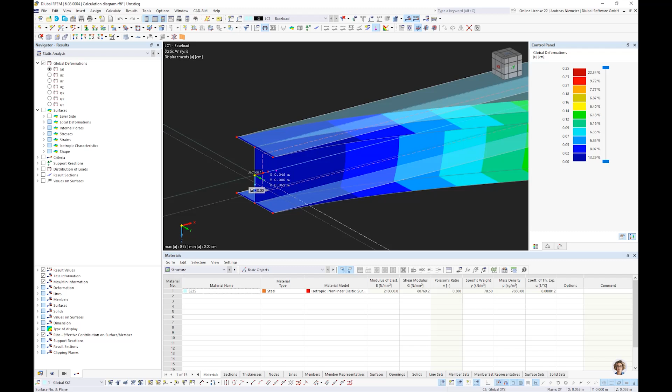And additionally, what is also new now: maybe you know it from RFEM 5, that you can drive over these surfaces and pick something. I pick now one at the beginning, and I can pick one in the middle. But for me these points are quite randomly placed, so I don't like this.

But now in RFEM 6 you have the option to say these are result points for surfaces. They're stored here in this list, where you can specify them, and you can say the first one is maybe placed 1 centimeter inside the beam and in the middle, and the second is maybe in the middle of the beam, 2.5 meter, 0 and 0. So now the result points have the right place.

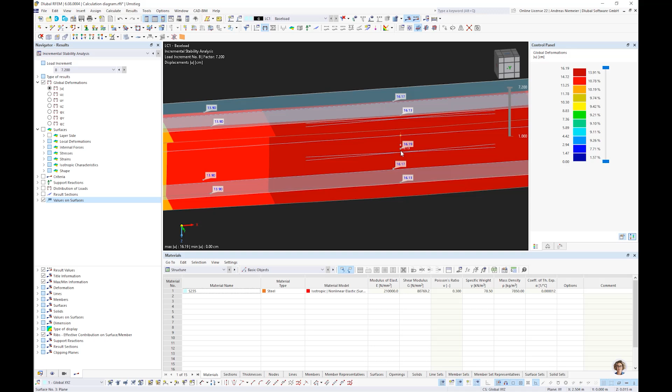If you show the result, maybe also here from the incremental analysis, values on surfaces, you get here now a value. So far it's clear. But why I mention it is something new that was not possible in the old version. You have here a result diagram viewer, where you can say, please document, for example, in the incremental method for load case 1, on the horizontal axis the load factor, and on the vertical axis the surface equivalent stress von Mises, the max one for the web surface, and here not for nodes, but really new, for result points, maybe for the first one.

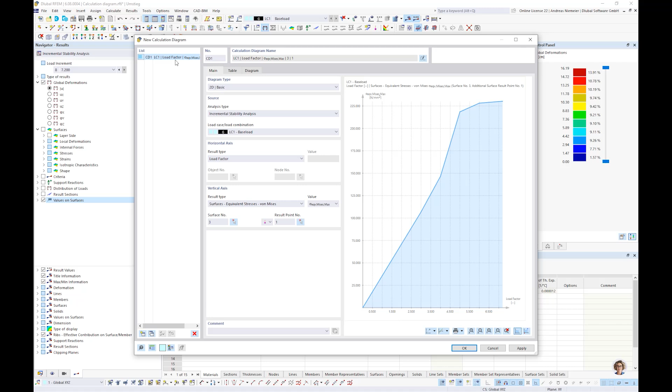And you see now how the load near the support increases elastically, and then you have this yielding effect. And if you copy this diagram and change it to the second point, you get it also for the second diagram, where it happens really later. And this was always a wish: can I overlay it like on an overhead projector? And now you can do it.

You can make a new diagram with type group. The program recognizes similar diagrams, and now you have both results in one scheme. You see now the first one, the blue one, and then at some stage the second is also yielding, and quite fast. Of course the accuracy of this diagram depends on your steps, but this gives you options to analyze it in a targeted manner. And this is what I wanted to show you.

And this brings me to the end, and I hope I could show you with these few examples the differences to the old generation and how much work our team did to fulfill all these wishes from the past, beside all the general stuff.

Thank you, Andreas, for your nice presentation. I hope you could see good features or good reasons for switching from RFEM 5 to RFEM 6.